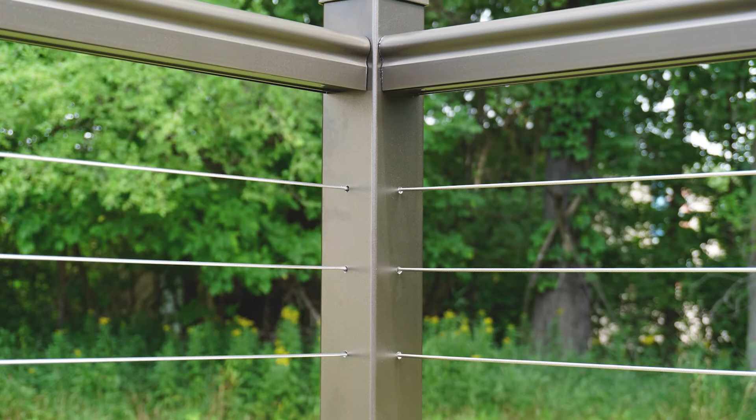This video will guide you through the installation of horizontal cable railing on level deck surfaces, no bottom frame. Please understand all instructions completely before starting any part of the installation. Prior to starting the installation of any aluminum railing project, ensure you have the proper tools and safety protection.

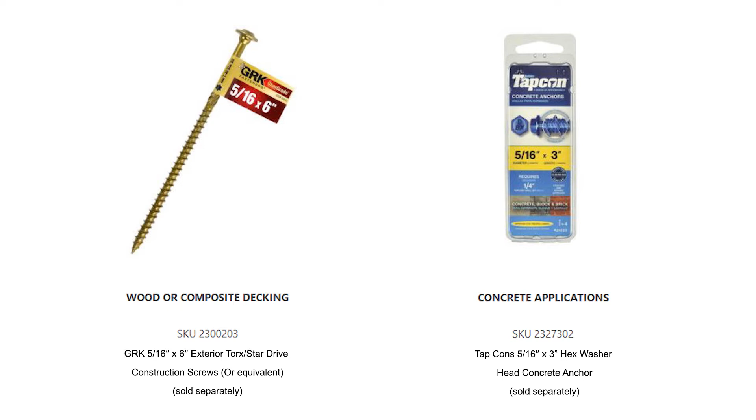We recommend the following tools: safety glasses, tape measure, pencil, level, miter saw with non-ferrous blade, cordless drill, 4 clamps, carpenter square, appropriate fasteners for mounting posts to deck surface, cutoff tool, 6-inch number 2 square drive bit, 1/8" and

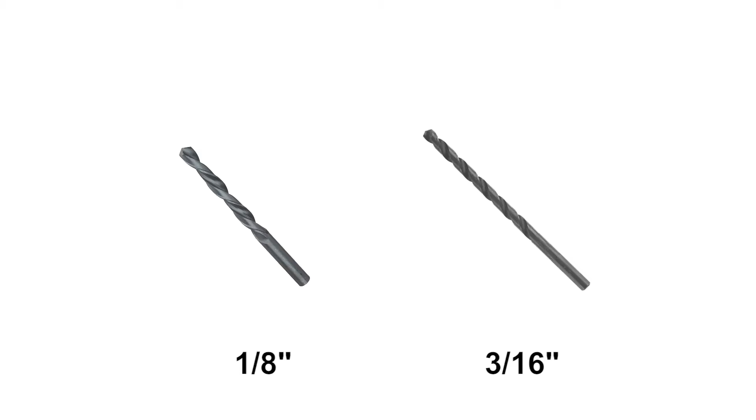3/16" drill bits, 3/16" hex wrench, included with cable kits, cable gripping tool, optional, cable cutting tool, optional, cable release tool, optional, threading tool, optional, 90-degree threading tool, optional. Kits and parts for assembly:

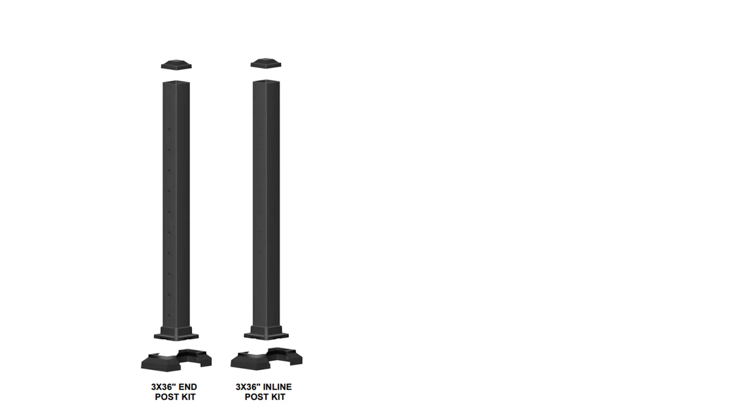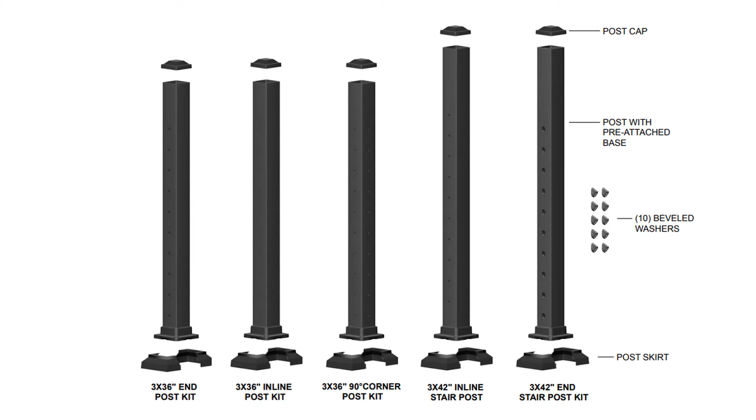3x36" end post, 3x36" inline post, 3x36" corner post, 3x42" inline stair post, 3x42" end stair post. Each post kit includes an aluminum post tube with attached base plate, post cap, and 2-piece base plate cover and an install guide. 3x42" end stair post kit includes 10 beveled washers. Post to deck mount screws, anchors are sold separately.

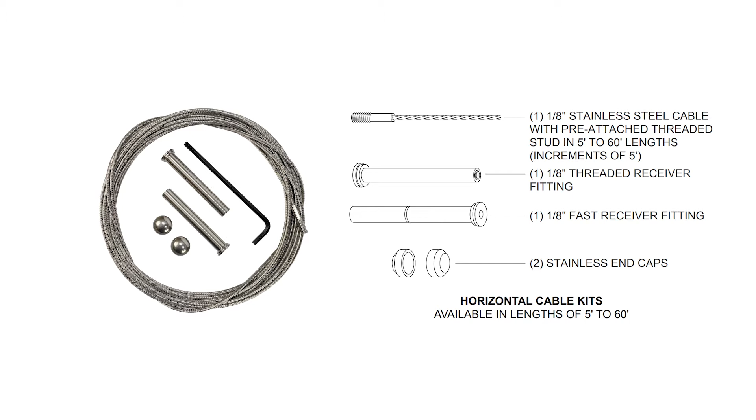Horizontal cable kits available in lengths of 5 feet to 60 feet. 1 1/8" stainless steel cable with pre-attached threaded stud in 5 feet to 60 feet lengths, increments of 5 feet. 1 1/8" threaded receiver fitting. 1 1/8" fast receiver fitting. 2 stainless end caps.

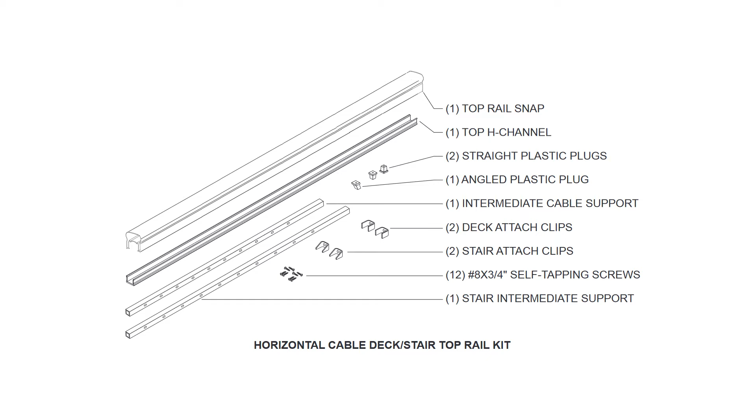Horizontal cable deck stair top rail kit. 1 top rail snap. 1 top H channel. 2 straight plastic plugs. 1 angled plastic plug. 1 intermediate cable support. 2 deck attach clips. 2 stair attach clips. 12 number 8 by 3/4" self-tapping screws. 1 stair intermediate support. Important notes: do not install base plate covers until railing assembly is completed.

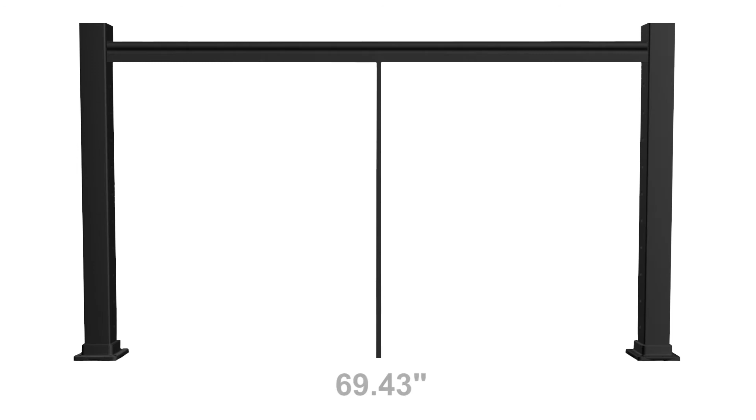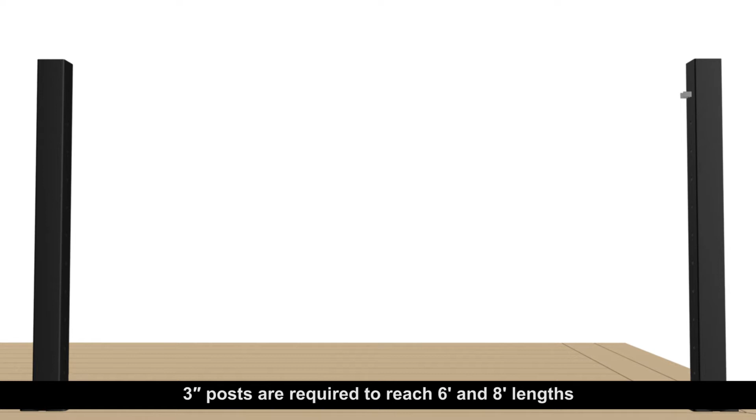Actual cable panel lengths 69.43 inches and 91.31 inches. 3-inch posts are required to reach 6-foot and 8-foot lengths. Caution: if installing lighting, wiring must be installed prior to securing posts to deck surface and installing top rail snaps. Let's get started. First, we'll plan out and install the 3-inch aluminum posts.

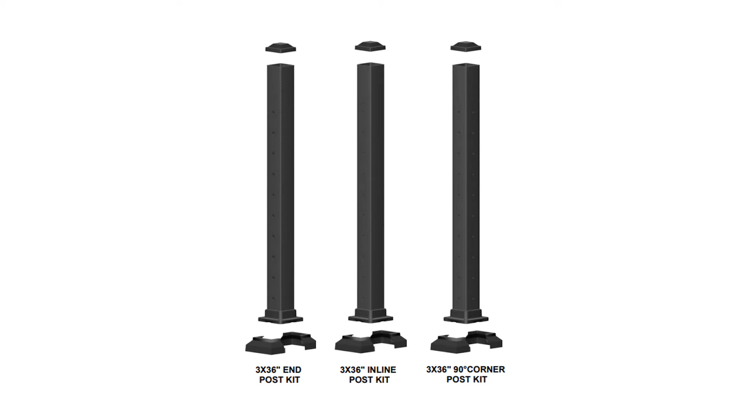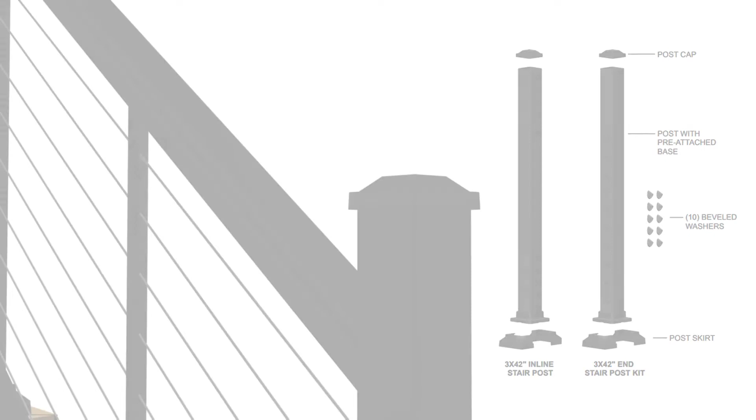Determine necessary posts required: end, inline, or corner. Note: for structural integrity and proper installation, it is critical to use the correct railing posts in all locations. Corner posts are required for all 90-degree corners, and inline posts are required for all 45-degree corners. 42-inch stair posts are required for stair applications. Plan ahead for cables up to 60 feet in length and install end posts at the appropriate locations.

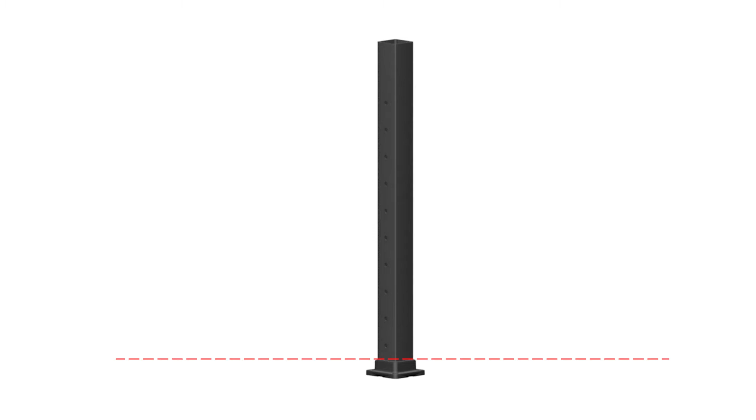Important: for 90-degree corner post applications, prior to installing rail attachment clips, ensure plastic plugs are installed in 2 pre-drilled hole locations. Leave plastic plugs in place until threading cable through corner posts. Measure from the top of the base plate upper shoulder. Place a horizontal pencil mark at 33 3/8 inches for 36-inch rail height. Next, measure the center of the 3-inch posts and place a vertical mark at center of post.

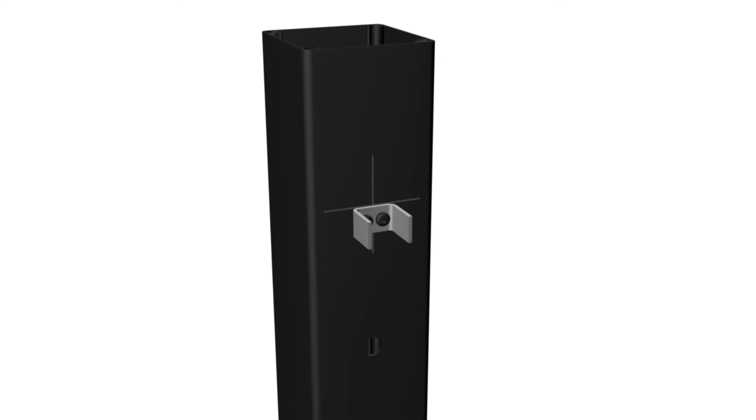Install 1 upper attach clip per opening. Center 1 upper clip on pencil line. Secure attach clip with 2 number 8 by 3/4" self-tapping screws. Important: only install 1 upper clip per opening. Install proper post blocking. Use proper attachment screws or anchors as directed. Deck screws at each post location are not included with post kits.

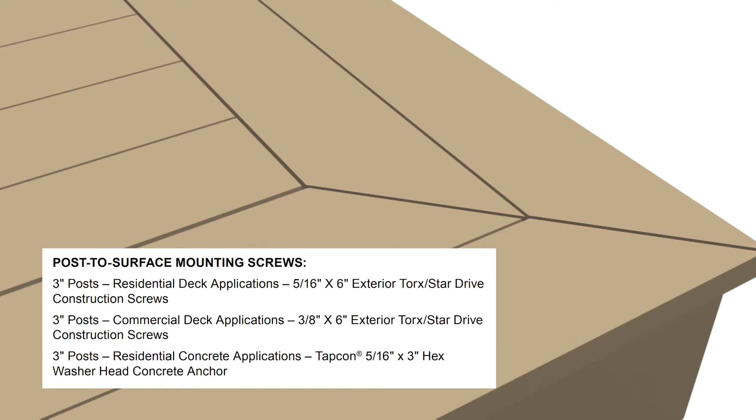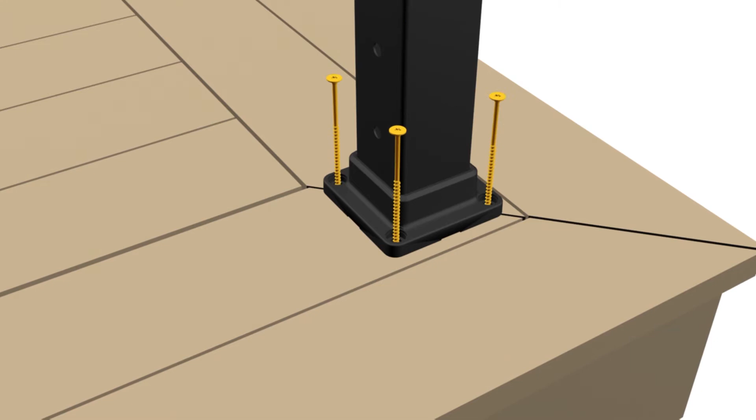With 3/16" drill bit, pre-drill through deck boards and into blocking. Drill a 5/8" hole in center of 4 deck screw holes for lighting wires. Optional. Level and plumb post using shims. Secure posts to deck with suggested screws. Deck installation without bottom rail. Use only deck stair top frame kits.

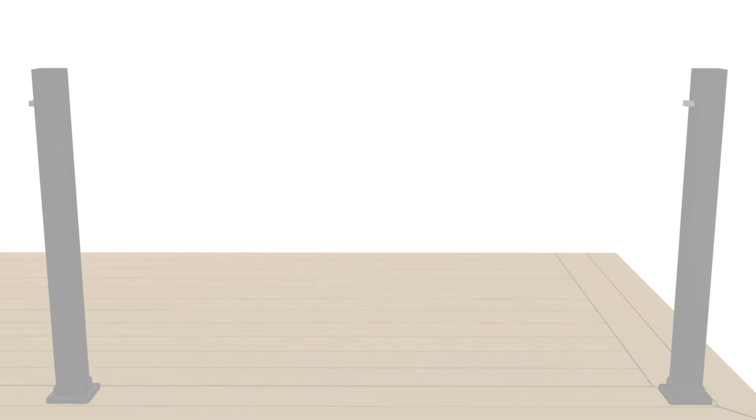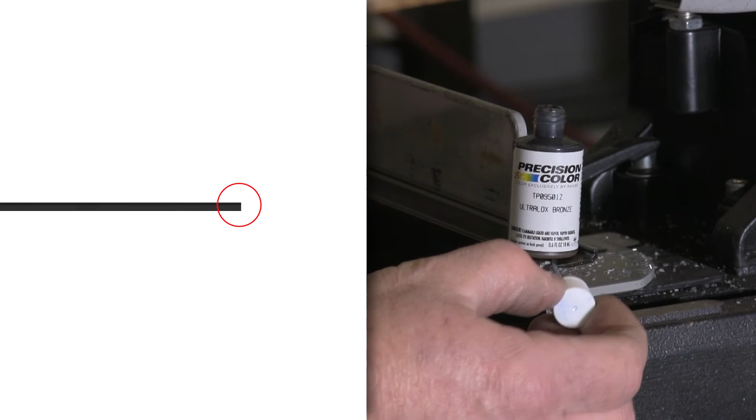Measure openings between posts and cut 1 U-channel per opening. Cut 1/16 inch less than opening size. Clean cut areas and apply touch-up paint on exposed ends. Measure and mark the center of top U-channel. Drill 1/8 inch hole in the center of top U-channel. Attach 3/4 inch by 3/4 inch plastic plug to the flat side of upper U-channel with 1 number 8 by

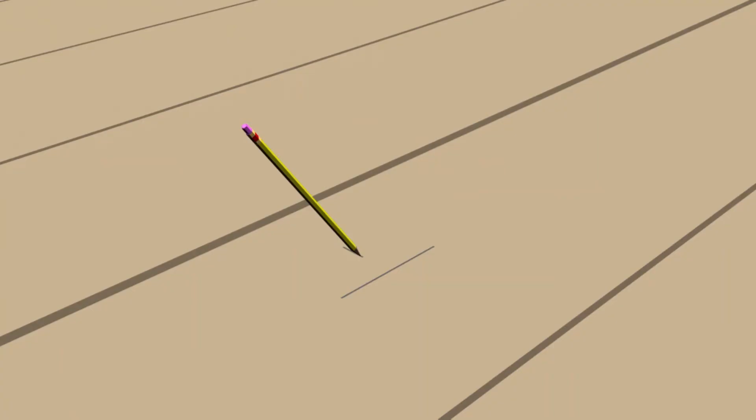3/4 inch self-tapping screw. For 36 inch height railing, cut cable support to 34 inches. Important: only cut from bottom end of support, which can be identified by a longer section without a cable hole. Verify alignment of cable holes with posts before cutting. Measure between posts and mark center point on deck surface.

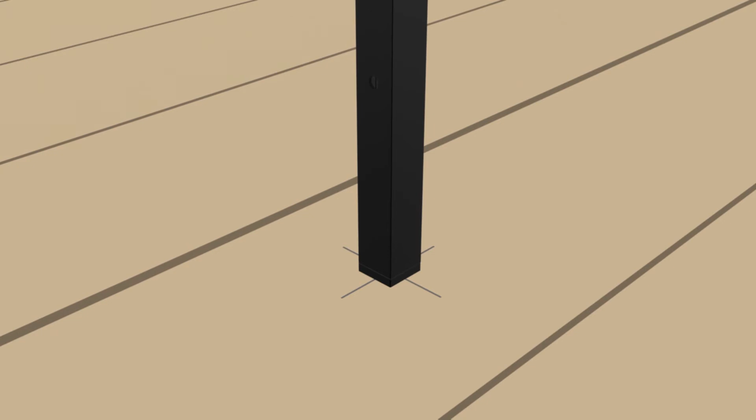Attach 3/4 inch by 3/4 inch plastic plug to the deck surface with 1 number 8 by 3/4 inch self-tapping screw. Insert 3/4 inch by 3/4 inch intermediate cable support onto plastic plug, which is attached to deck surface. Then attach upper U-channel by inserting attached plastic plug. Again, verify alignment of cable holes with posts.

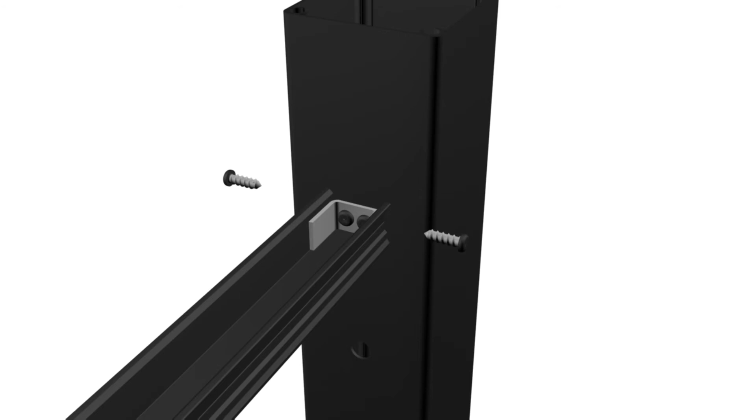Secure one end of U-channel to pre-installed upper channel clip with 2 number 8 by 3/4 inch self-tapping screws. At opposite end of U-channel, insert rail clip into U-channel. Align top edge of rail clip against prescribed pencil line. Attach rail clip using 4 number 8 by 3/4 inch self-tapping screws. Clamp or hold the top snap against posts and mark for cutting.

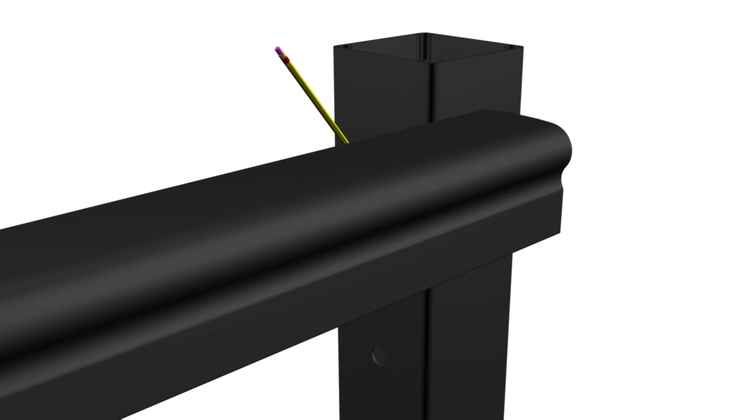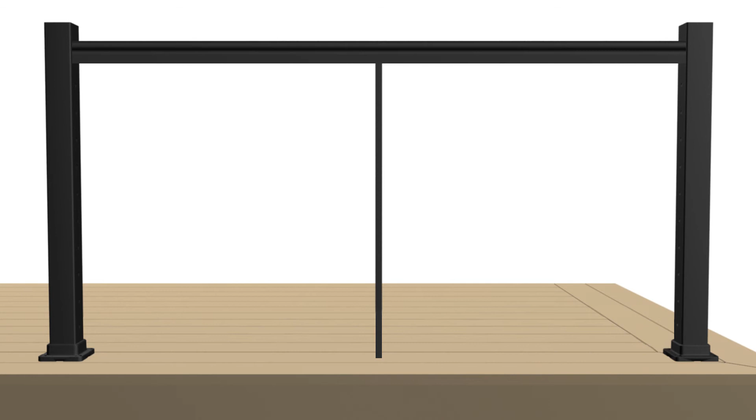Cut top snap 1/16 inch less than opening size. Clean the cut areas and apply touch-up paint on all exposed metal. Install top rail snap by pushing down on snap until fully seated on the upper U-channel. Helpful hint: apply downward pressure on top rail starting at one post and working towards the other post. Do not use a hammer to secure top rail.

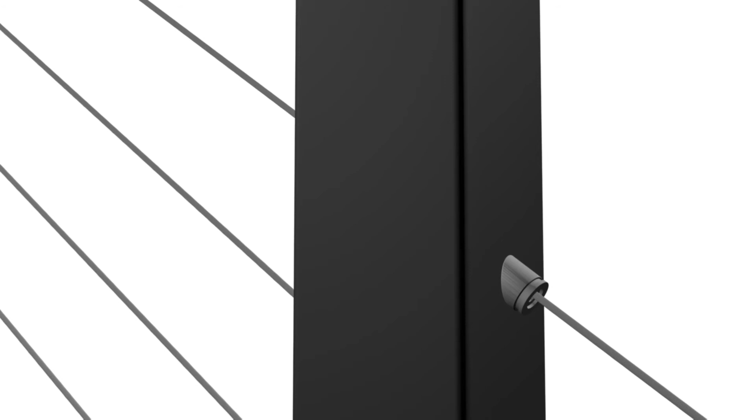Next, we'll install the horizontal stainless steel cables. Insert the threaded receiver fittings into the post. Note, if end post was installed too close to a house wall, it may be necessary to loosen post anchor bolts. Note, plan so that the threaded receiver fittings are at the starting point and the fast receiver fittings are at the bottom of stair run or the final post on the deck. Cable runs cannot be longer than 60 feet. If railing is longer than 60 feet, an end post will need to be used to finish and start a new cable run.

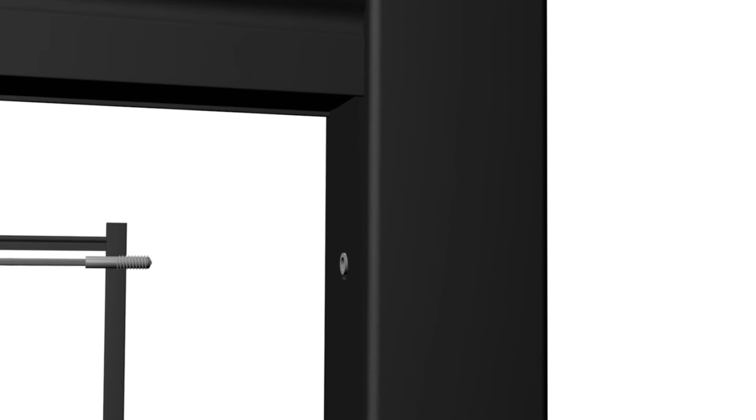Thread the male swaged cable stud, attached to the cable, into the threaded receiver fitting, and turn 3 to 4 complete turns. Thread about 1/2 of the stud into the threaded receiver fitting. Feed the bare end of the cable through all your intermediate cable supports and through the end post where you will be installing the fast receiver fitting.

Corner post inserts allow for easy feeding of cable through 90-degree posts. Cable threading tools, straight and corner versions, are recommended for easy feeding of cables. When using the threading tools, push the cable through posts rather than pulling them. This prevents separation of the cable and tool. Note: alignment plugs are installed in 90-degree posts to keep insert holes aligned. Do not remove plugs until cables are installed into empty holes.

Rotate the fast receiver fitting clockwise as you push it onto the cable. If the cable begins to unravel, you are rotating the fitting in the wrong direction. Important: for bottom of stair runs, beveled washers must be installed to align fast receiver fittings with pre-drilled holes in post. Note: it is normal to have trouble inserting the cable into some fittings. This occurs if the locking mechanism is already locked. To free it up, insert a cable release tool or other tool with 1/8 inch or smaller diameter. Larger tools may get locked in the fitting and become very difficult to remove.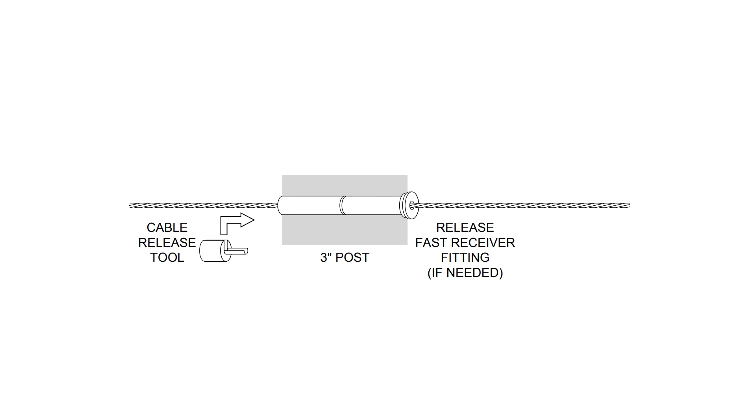Push the fast receiver fitting along the cable and firmly into the hole in your post. While holding the receiver against the end post, pull the bare end of the cable to remove as much slack in the cable as possible. Important: inspect to ensure there is no slack along the whole length of the wire, especially around corners. If you need to remove a cable from the fast receiver fitting, slide a cable release tool onto the cable, then push firmly into the fitting. This will release the mechanism to pull the cable back out. Cut the cable flush with the hole in the back of the fast receiver fitting using a cutoff wheel.

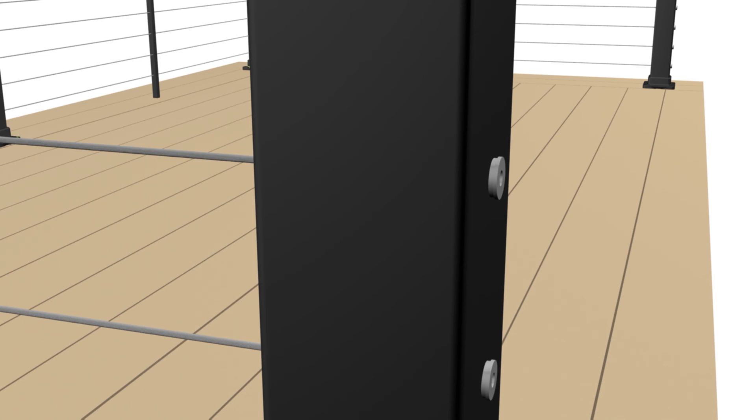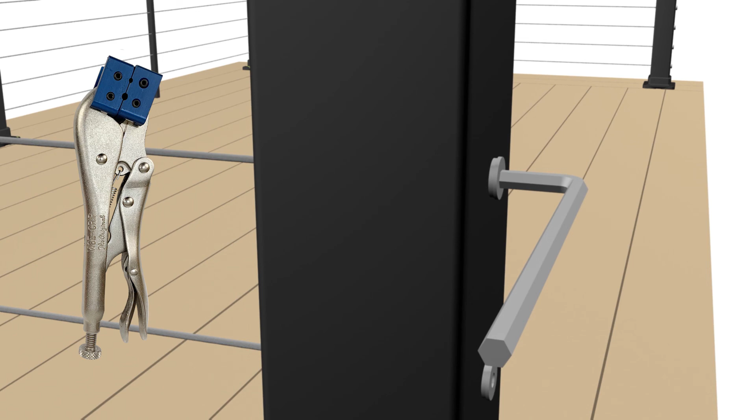Go to the other end and tension the cable by holding the cable securely to prevent it from turning while you turn the threaded receiver fitting with a hex wrench. A cable gripping tool is recommended. Be careful to protect the cable from damage while tensioning. The male swaged cable stud will be pulled into the threaded receiver fitting by rotating the threaded receiver fitting clockwise.

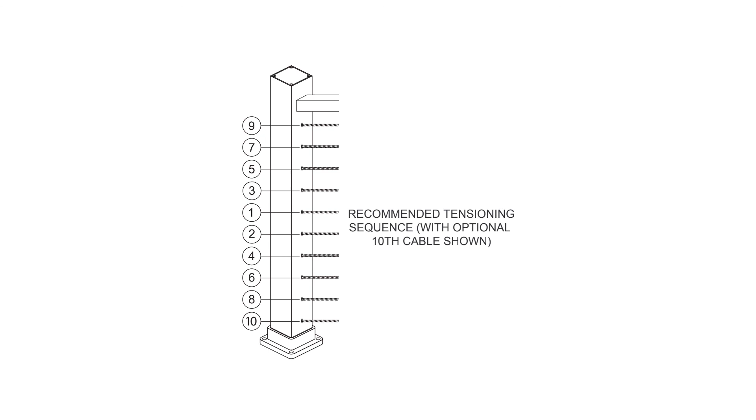Tension all cables in sequence, beginning with the center cables, moving up and down toward the top and bottom. As you tension each cable, give it a sharp pull downward mid-span to help set the wedges, gripping mechanisms in fast receiver fittings. Then re-tension as necessary in the same sequence. Be aware that the cable may move as much as 3/16 inch toward the tensioning terminal as the wedges seat.

Press stainless steel caps onto all fast receiver fittings and threaded receiver fittings. Helpful hint: spray window cleaner onto stainless steel caps to ease installation. Install post caps and post base plate vinyl covers after railing assembly is completed.